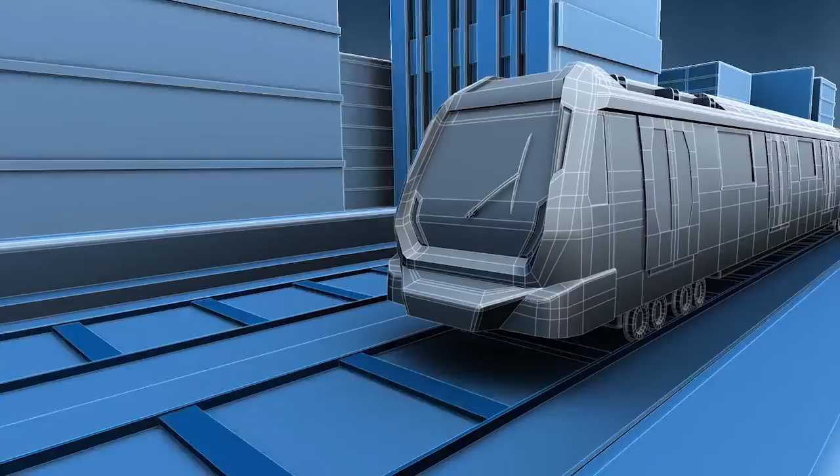A new transportation network is under construction in Kuala Lumpur. It is the KVMRT, the Klang Valley Mass Rapid Transit. The KVMRT's first alignment, the Sungai Buloh Kajang line, stretches a distance of 51 kilometers with 31 stations. A major section of the line is constructed above ground, while 9.5 kilometers is built underground. The KVMRT is part of a new transportation model that will change the infrastructure landscape of the Klang Valley.

I wanted a game changer, and I realized that for any modern metropolis to be vibrant, to be competitive, to be on par with some of the leading cities in the world, you've got to have a modern public transport system. The alignment will traverse through some of the most congested areas in the Klang Valley, challenging Malaysian engineers to deliver one of the most advanced infrastructure projects of the country.

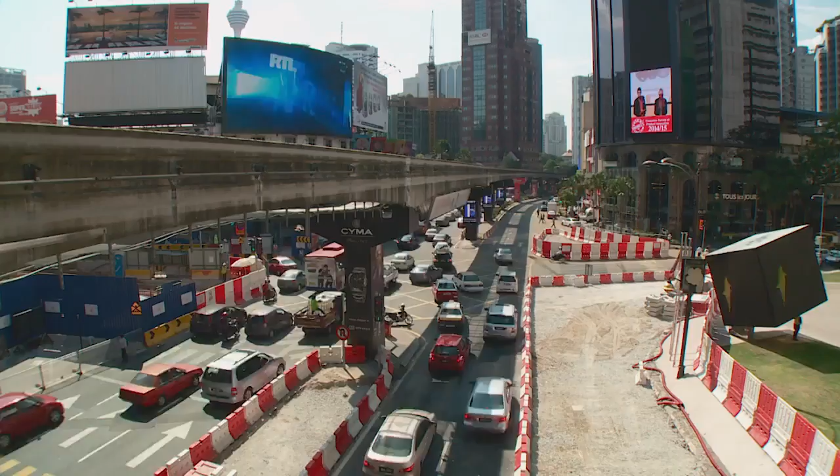Klang Valley or Greater Kuala Lumpur, a fast-growing metropolitan and home to 7 million people, with an expected increase to 10 million by 2020. This city is notorious for its traffic congestions. Every day, about 3 million cars enter the city centre.

We need a good public transport system for Kuala Lumpur and Klang Valley, because what we had was a public transport system which was not integrated.

In 2010, the Malaysian government initiated the Economic Transformation Program, ETP, to elevate Malaysia into a developed nation by year 2020. The objective of the program is really to transform the economy of Malaysia to become a high-income economy that is inclusive, at the same time sustainable.

We could not help but identify Greater Kuala Lumpur or Klang Valley as one of those national areas of focus. Part of the Economic Transformation Program, ETP, is to construct a mass rapid transit MRT system to create an integrated public transport network. We were quick to realize that it was just absolutely necessary for us to build a mass rapid transit in Klang Valley.

We didn't think there was any other option. We couldn't rely on other forms of transport such as buses and taxis to do it. We really have to move a lot of people within the city so that it becomes a lot more livable.

The MRT system for Greater Kuala Lumpur will first include 2 new MRT lines spanning 103 kilometers, serving a radius of 20 kilometers of the city centre. With the construction of these lines, people will be able to travel between populated residential districts, commercial centres and key employment areas within the Klang Valley.

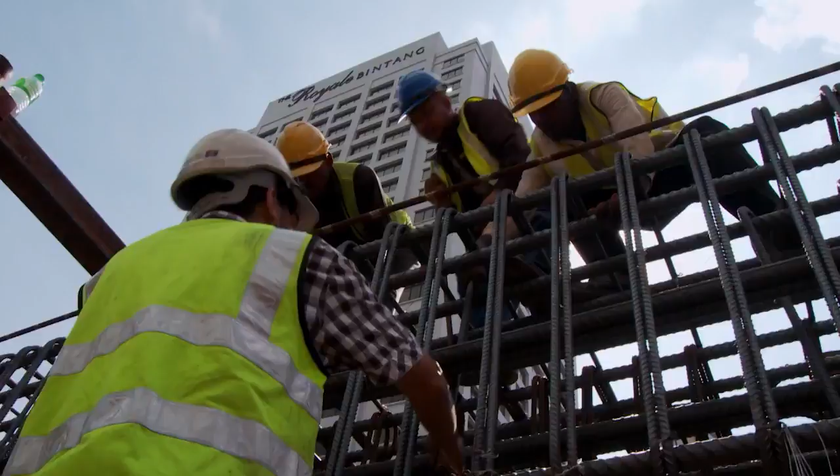In July 2011, the Prime Minister of Malaysia, Datuk Seri Najib Tun Razak, launched the biggest infrastructure project ever undertaken. It was his vision to improve the connectivity within the Klang Valley and radically enrich the lives of the people. The KVMRT's first alignment is the Sungai Buloh Kajang line.

It will stretch 51 kilometers with 31 new stations, serving a population of 1.2 million people. The majority of the line is constructed above ground, while 9.5 kilometers is built underground.

To execute the government's mandate to complete the KVMRT project, MRT Corporation was formed with Datuk Seri Shahril Mokhtar, currently helming the position of the Chief Executive Officer.

Basically, MRT Corp is owned by Minister of Finance Incorporated. So our role is basically as an asset owner, as a project developer. And we are a so-called liaison entity between the project partner and also the government.

On 10th February 2012, MMC Gamuda was appointed as the Project Delivery Partner, or PDP, for the Sungai Buloh Kajang line. The PDP approach is the best approach, again, when it comes to building a major infrastructure project.

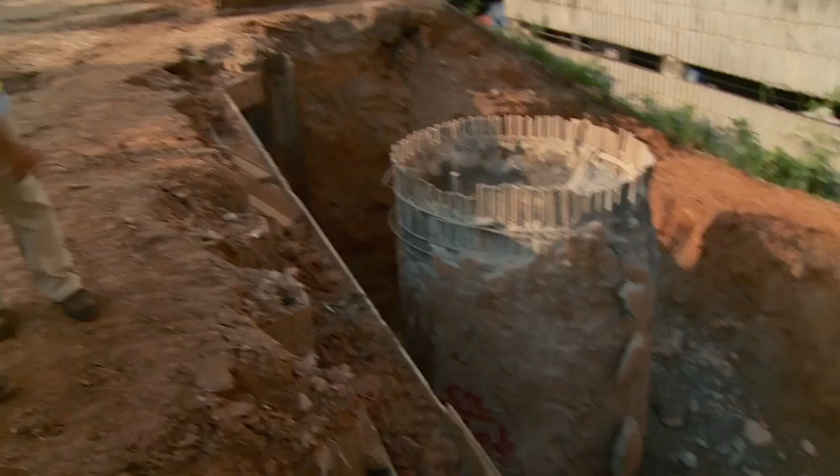The key element here is about risk. We basically transfer the risk to the project partner in order for them to deliver the job or the project within time, within budget, and they take up most of the risk.

A special MRT Exco committee was also set up to ensure that this project moves swiftly and smoothly. MRT Exco is very crucial in the whole spectrum of this project. The idea of having this MRT Exco is just to solve issues. It doesn't take long, maximum an hour, once a month. That is a very good platform in order to expedite the project.

But constructing a new transport system in the Klang Valley is not an easy task. Some parts of the KVMRT viaducts and stations weave through highly congested traffic areas.

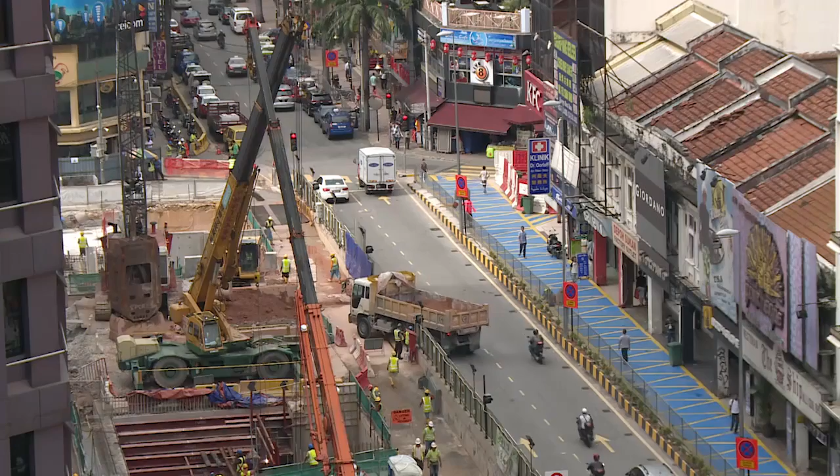To ensure that all parties, whether it is the community or businesses adjacent to the MRT alignment, are well informed of the construction activities, stakeholder engagements are carried out. Community engagement to me is a very important part of the whole construction process itself, because you can't build something through a community without engaging them. For Line 1, over 3,000 engagement sessions have been held with residents, resident associations, business people, traders and other groups.

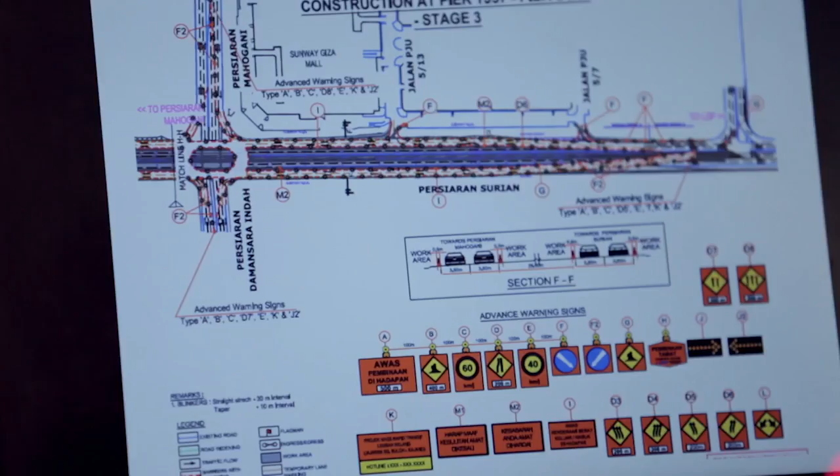To ensure that the construction of the KVMRT will create minimal disturbance, an extensive traffic management plan was put in place. Before we start any construction, we would have to plan the traffic management meticulously. What we do usually is we sit down in a room and do the desktop planning to tie in with the construction sequence. Then we do simulation.

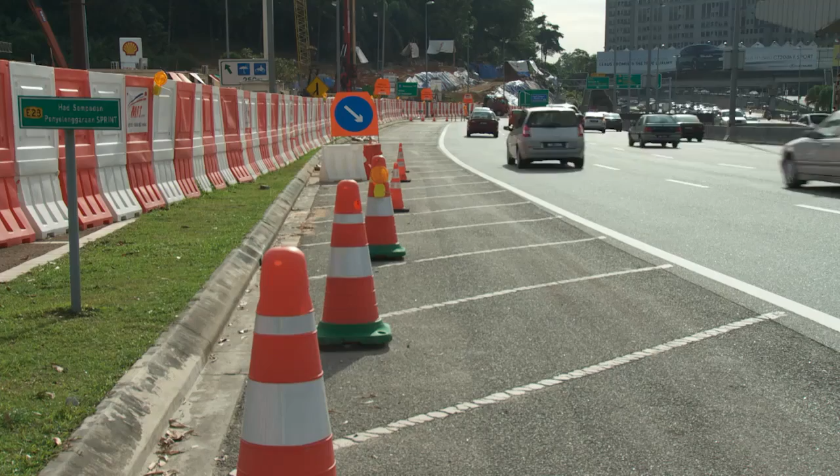This is then followed by a trial road closure. This trial closure is to see what is the impact when we actually do it. This is done to validate our study and our simulation. Once the trial is successful, then we go for full implementation.

One of the most challenging traffic diversions ever to be implemented is at the Persiaran Surian nearby Sunway Giza. This is due to simultaneous construction of an underpass. That particular area, we are building the station. We are also building an underpass for the local authority, which is part of the project. And we have had to do the traffic management in two major stages.

In all this, we have a traffic management team on standby 24 hours to make sure that nothing goes wrong. If there's anything that we did not plan earlier, then we can take care of that immediately. Road users' safety is always the number one priority. Our work should not put the public at risk, and therefore that's why we would close roads. We would hold up traffic. Yes, it's an inconvenience, but it's for the safety of the public.

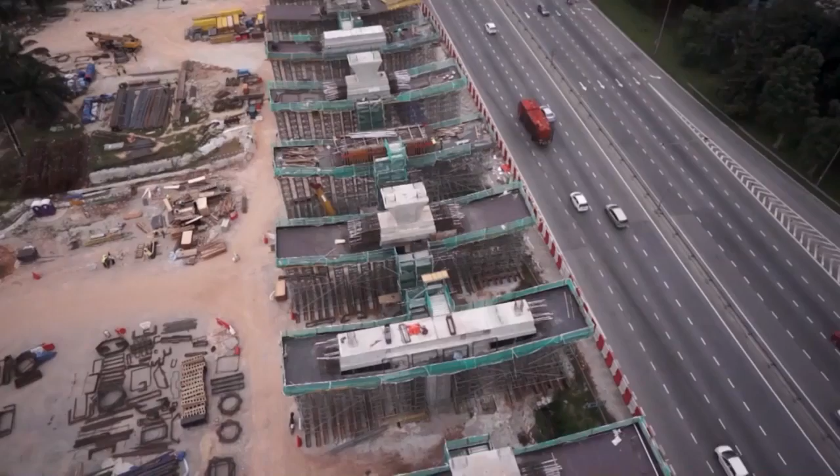The elevated section consists of 1,400 piers to support 17,000 segmental box girders that form the viaducts. There are 24 elevated stations and 2 depots, one at Sungai Buloh and another at Kajang.

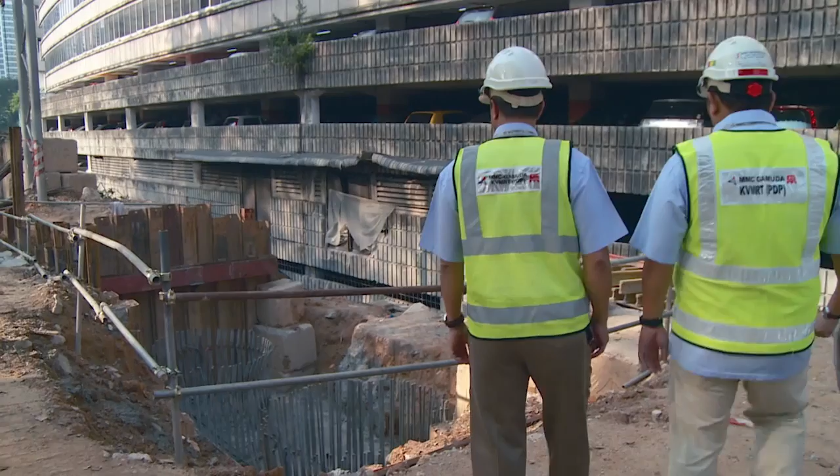To ensure the success of this project, a strict procurement process was implemented. Companies were subjected to stringent evaluations to ensure that only the best, most experienced and competitive contractors were selected. There are 8 different work packages in the elevated section, divided into the northern package, which runs from Sungai Buloh to Semantan, and the southern package, which runs from Cheras to Kajang.

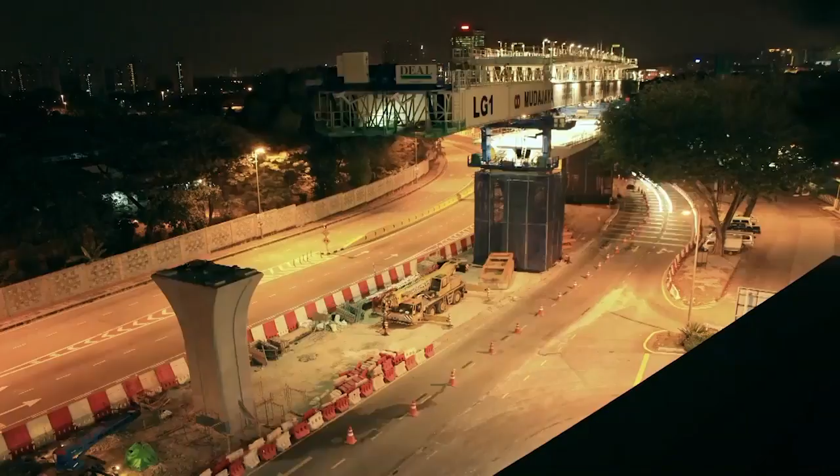400-ton launching gantries were used to build permanent viaduct guideways by erecting the segmental box girders, or SBGs. The gantry is basically a sort of a crane lifting mechanism. It lifts all the units together. It aligns them so they're all in a nice line. And at our peak, we had 21 gantries. That's a lot of gantries.

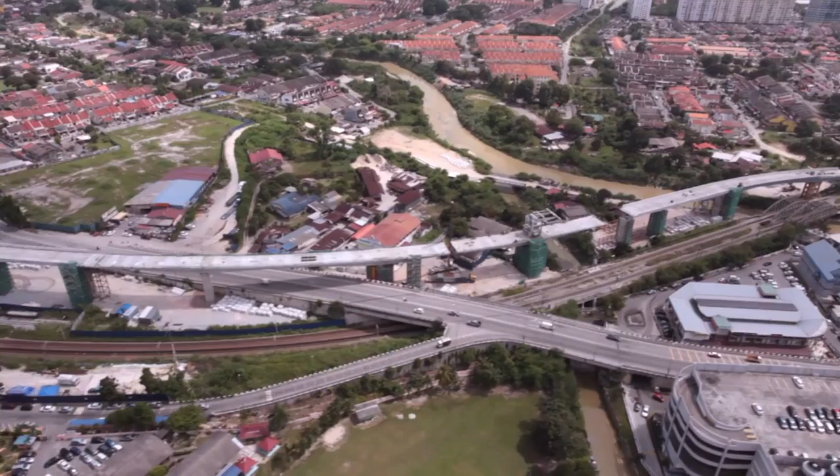The elevated guideways have to be built over existing roads and overpasses, making construction a challenge. The alignment itself must pass above the existing structure, name it a bridge or the highway. We have to pass above it.

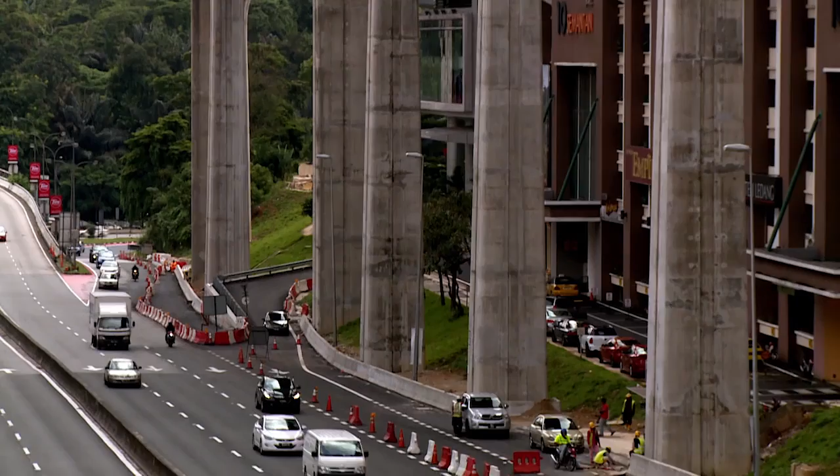At certain areas, the viaducts are built at extreme heights. When we talk about the gradient or the slope for a road, it can go up to 10%. But for train, it cannot go more than 3% because of the way the train operates. Otherwise, on rainy days, it will slip. That's why some areas you will see that the piers will be very, very high to make sure that the vertical alignment is maintained throughout the whole stretch.

While majority of the line is built above ground, one fifth of the Sungai Buloh Kajang line is constructed below ground. This is the biggest challenge faced by the construction team.

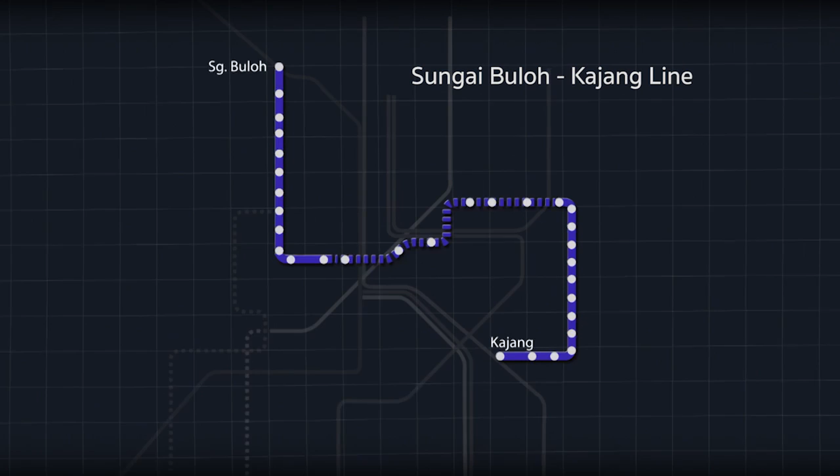The KVMRT's first alignment, the Sungai Buloh Kajang line, stretches a distance of 51 kilometers. To accommodate the construction within the city centre, 9.5 kilometers of the alignment is underground. For city centres, really the best thing is to put it underground. You don't have to demolish too many buildings. We're not looking to destroy areas, we're looking to enhance areas.

The design and construction of the underground works was awarded to MMC Gamuda KVMRT Tunnelling Sendirian Berhad for their extensive tunnelling experience and technological know-how. The underground section stretches from Semantan to Maluri while passing through 7 underground stations: Museum Negara, Pasar Seni, Merdeka, Bukit Bintang, Tun Razak Exchange, Cochrane and Maluri.

To build the tunnel, tunnel boring machines, or TBMs, were used to excavate rock and soil with special tools fixed on a rotating cutterhead.

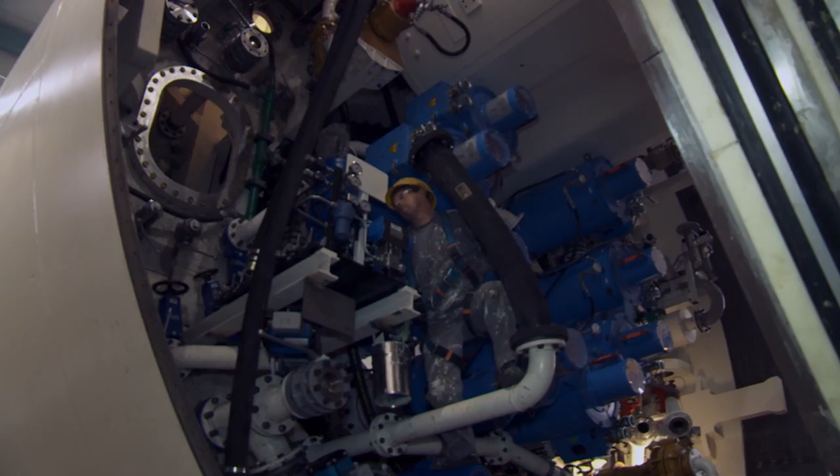MMC Gamuda KVMRT, working with German company Herrenknecht, came up with a revolutionary kind of machine, the variable density TBM, the first of its kind in the world. The first variable density TBM arrived in Malaysia in the beginning of 2013.

Transporting the TBMs to the sites through Kuala Lumpur was a challenge that needed detailed coordination. After 3 months of assembly, the first TBM was ready to begin mining. The launch of the first variable density TBM was officiated by the Prime Minister of Malaysia, Datuk Seri Najib Tun Razak, on 30th May 2013.

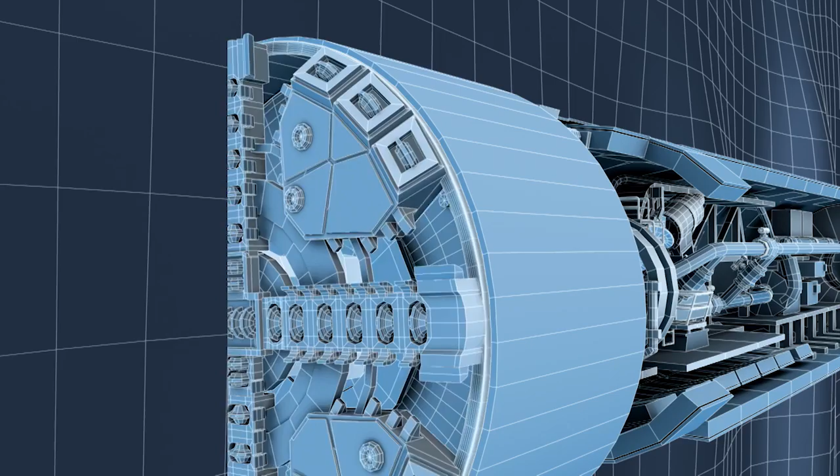The TBM is equipped to both excavate and build tunnel rings, which form the lining of the tunnel. Each ring consists of 7 segments and 1 keystone. A total of 11,500 segments were needed to line the dual 9.5-kilometer tunnels.

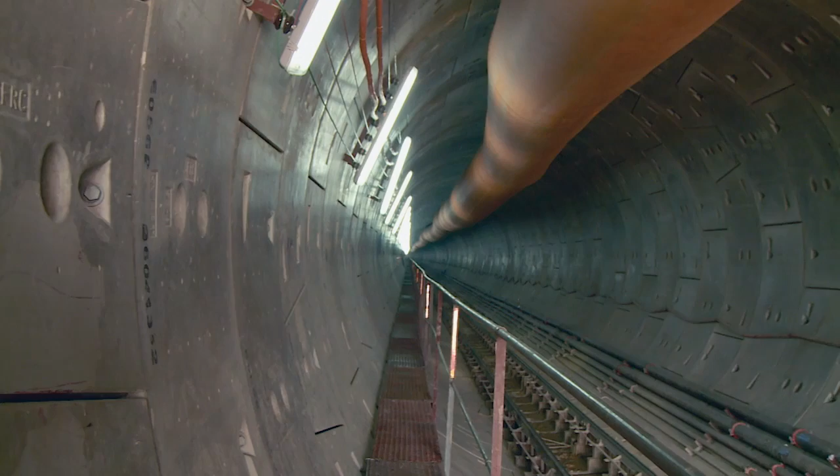Tunnel walls need to be strong enough to withstand extreme pressure and chemical attacks from the ground and water, and to also endure settlement caused by poor ground conditions. The tunnel segments were manufactured off-site at 3 different factories.

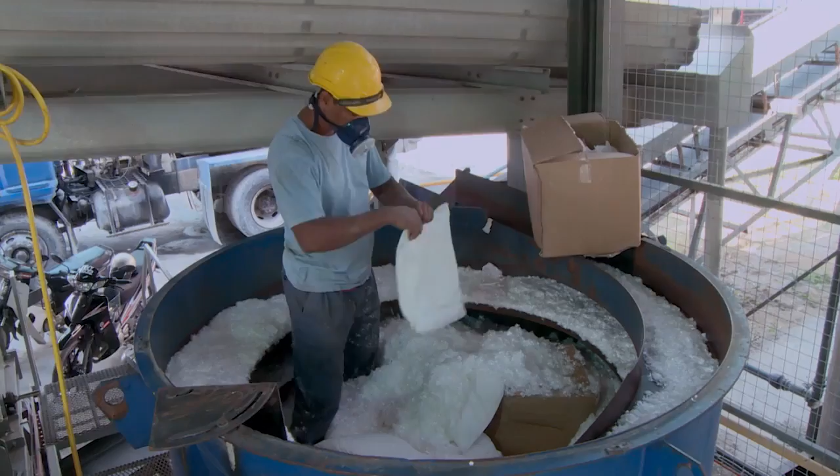We are adopting the technology we call steel fiber reinforced concrete, where we use a staple-like steel fiber to replace conventional thick and heavy rebar. On top of that, we are using another fiber called polypropylene fiber to improve the fire-resistant properties of our segments.

8 TBMs were used for this project. 4 TBMs were launched from Cochrane, 2 TBMs from Semantan North Portal, 1 TBM from Inai Shaft, and 1 from Pudu Shaft. The MRT tunneling project required thousands of workers over the 2-year period of construction, and MMC Gamuda set up an academy to train the hundreds of local workers needed for the underground construction works.

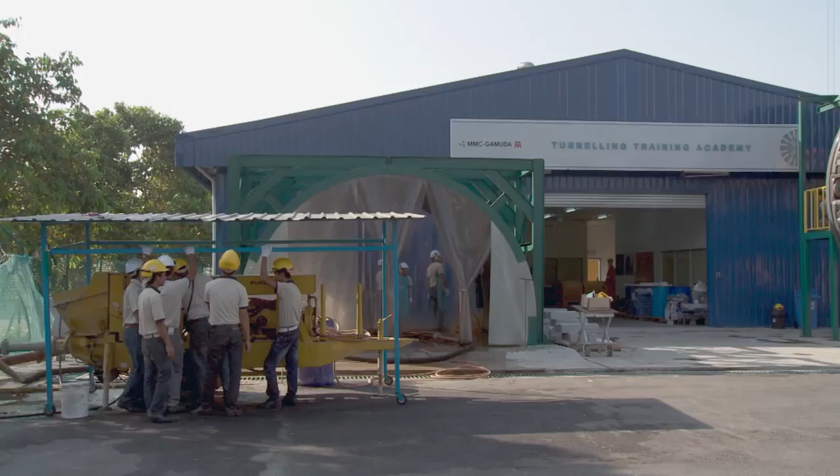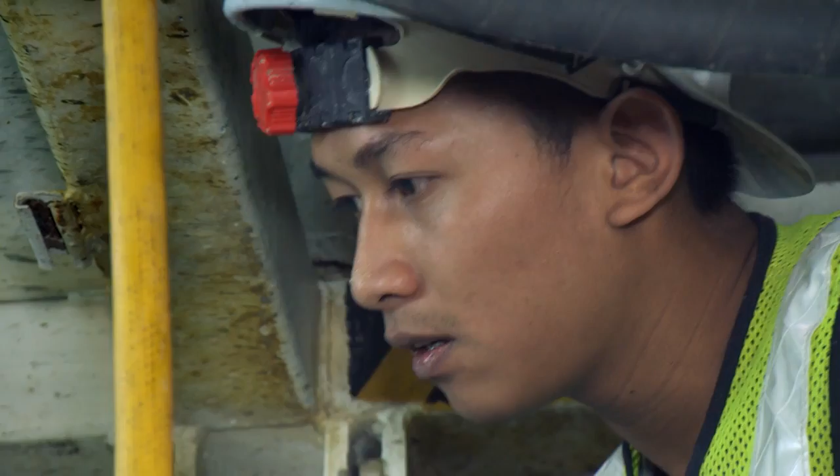The Tunnelling Training Academy, TTA, was the first of its kind in the world, with the aim to develop a workforce of highly skilled Malaysians who are proficient in the specialized field of tunnel construction. To date, over 16,000 professional and skilled workers have been trained at the TTA in various fields to support the tunnel and underground construction works, in particular for the KVMRT project.

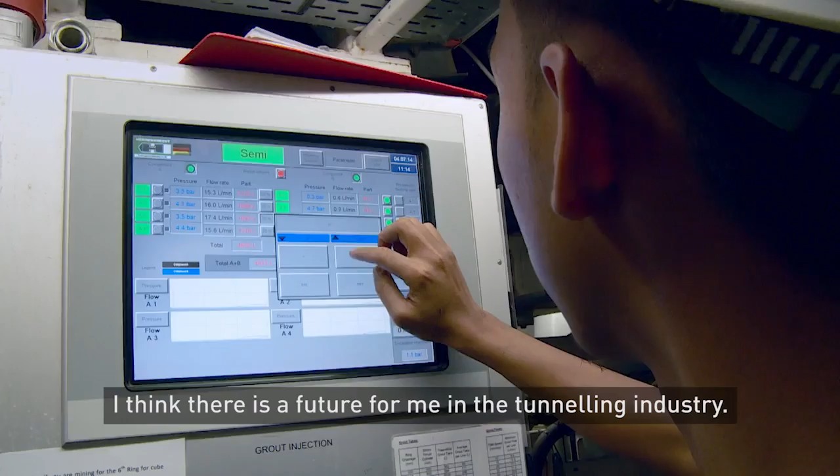I think the training of locals is very important. You need people to have the expertise. They've gone through the training school, they learn the basics, and then they've actually been put out on site and seen it in action, and that's enhancing their skills.

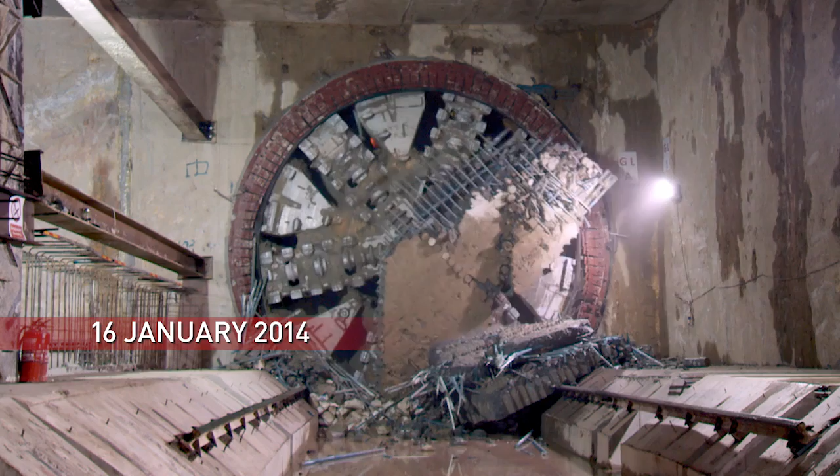The first 2 TBM breakthroughs were at the Muzium Negara station on 24th December 2013 and 16th January 2014. The machines were then pulled through and relaunched to continue tunneling towards the Pasar Seni station.

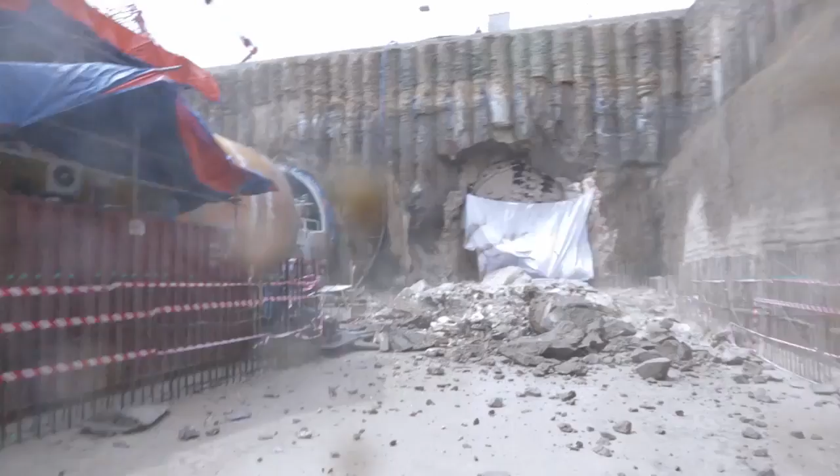On 24th April 2014, the fifth breakthrough occurred at Maluri South Portal with a big splash. This was the midpoint of the tunneling works.

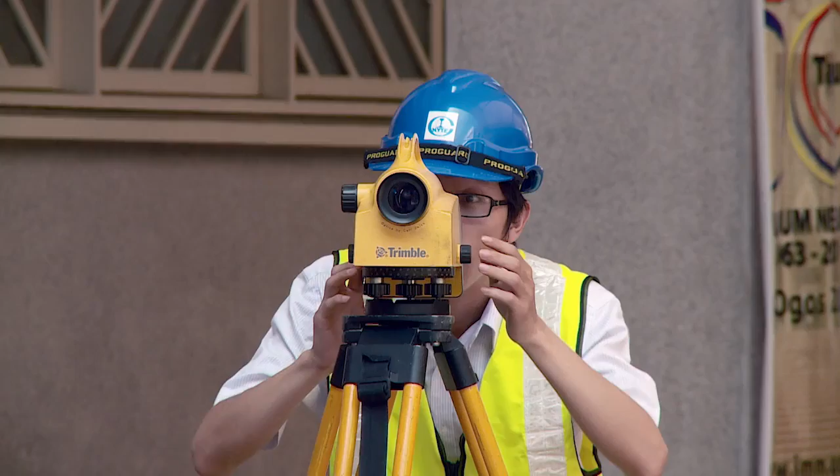Daily monitoring works are carried out on the structure and the picture murals. During the construction, we have allocated more than 200 instrumentation devices to monitor the Museum Negara building condition throughout all the days of our construction.

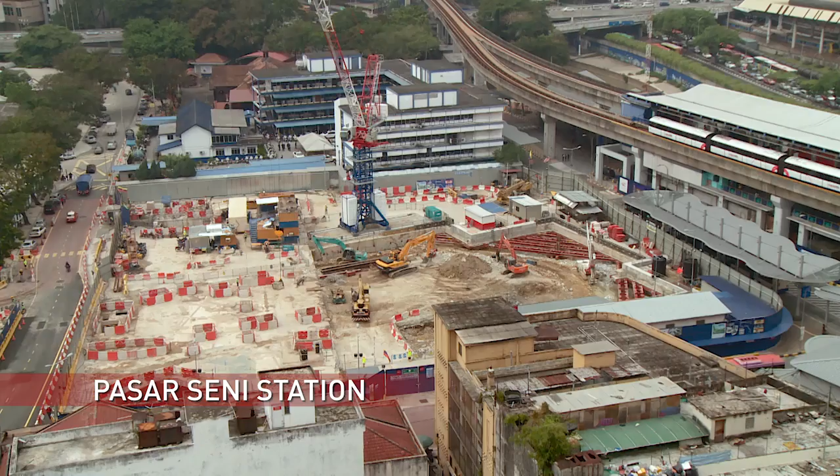The Pasar Seni station is located in Chinatown and connects to the existing Pasar Seni LRT station. Construction of this station required extensive protection of electrical cables that are part of the national grid.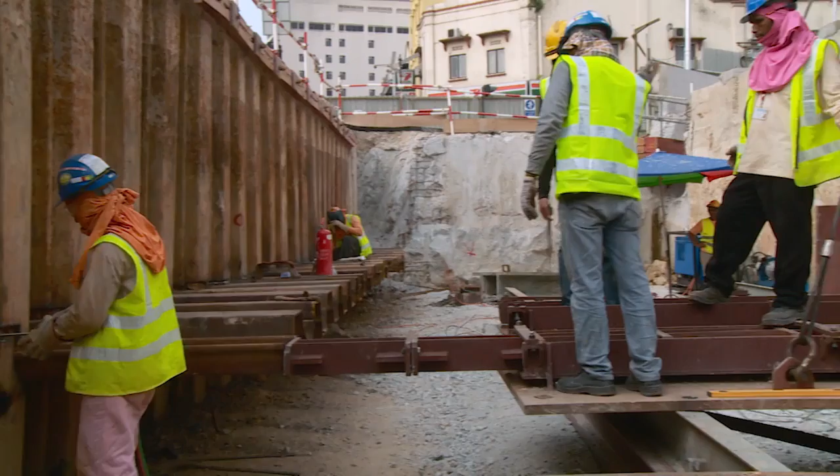While we were doing excavation, we got a big surprise. We found a 132 kV cable. This cable carries power for a third of Kuala Lumpur. A power cut here could cripple part of the city. We could not afford that to happen. A steel protection box had to be constructed to protect the 132 kilovolt cables located beneath the road.

The authorities insisted the cable stay in place. It cannot be moved at all. So the only option left for us was to build a steel box to support the cable so that we can work and excavate underneath.

All excavation works at the Pasar Seni station have been completed without any power disruption to the city.

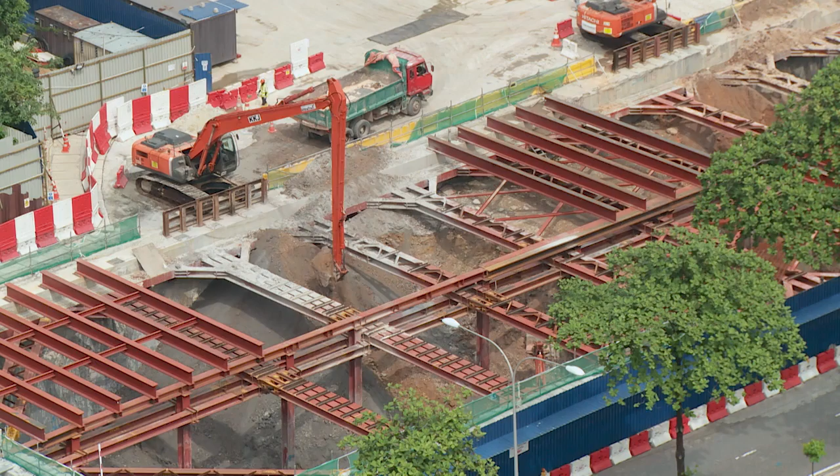The Merdeka station is located close to Stadium Merdeka and Stadium Negara. Over 30 meters deep, steel struts were required during the excavation works. The main challenge of this station is to construct 6 layers of strutting. We use up to 4,000 tons of steel to provide the earth retaining system strutting for our station.

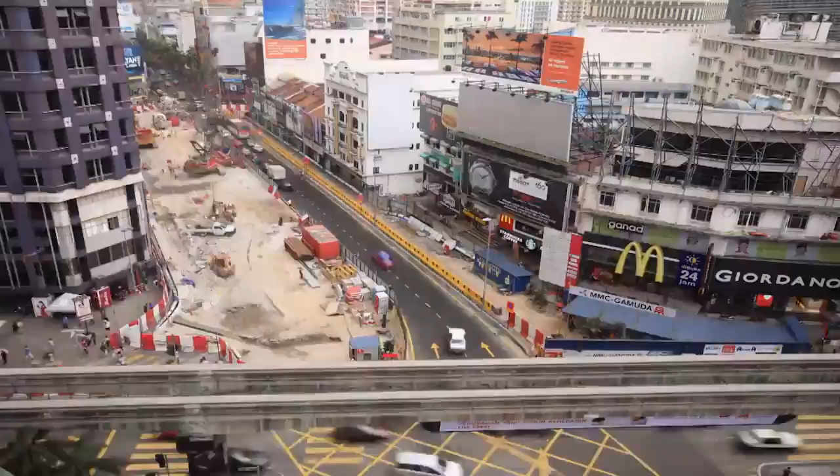Located in the heart of the Golden Triangle, the Bukit Bintang station is constructed in phases to ensure that traffic is not disrupted. The challenge for this area is traffic, definitely, because we have restricted hours. There are a lot of cars and a lot of public. Our challenge here is basically to maintain the environment with minimal disturbance.

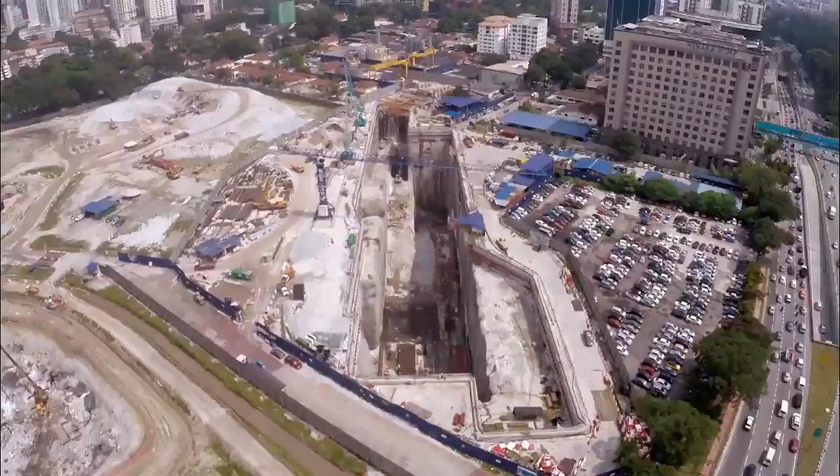The Tun Razak Exchange station is located nearby the future Tun Razak Exchange development. This is the deepest underground station, with a depth of 45 meters. It is built to connect with the future Line 2, the Sungai Buloh Serdang Putrajaya line.

The Cochrane station is within an area being transformed by large urban regeneration projects. Over 35 meters deep, the station works are moving forward quickly.

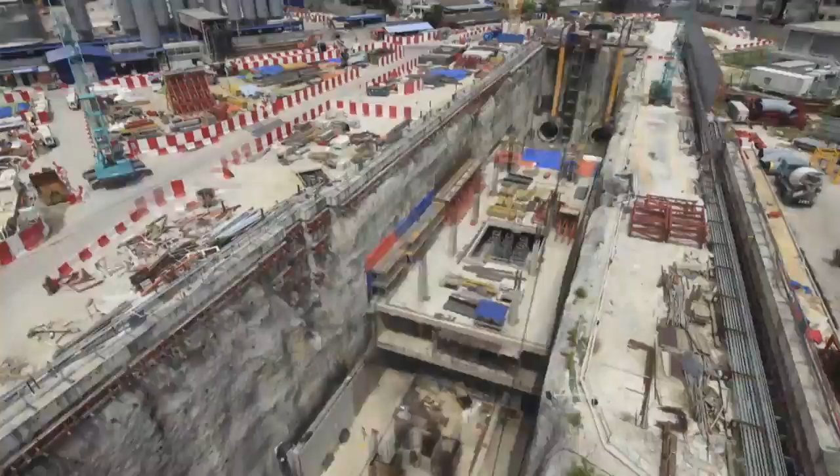Located beneath Jalan Cheras, the Maluri station was constructed in stages to ensure continuous traffic flow.

On 11th April 2015, the last TBM finally arrived and broke through at the Pasar Seni station. It is a thrilling moment for the engineers and tunnelling team.

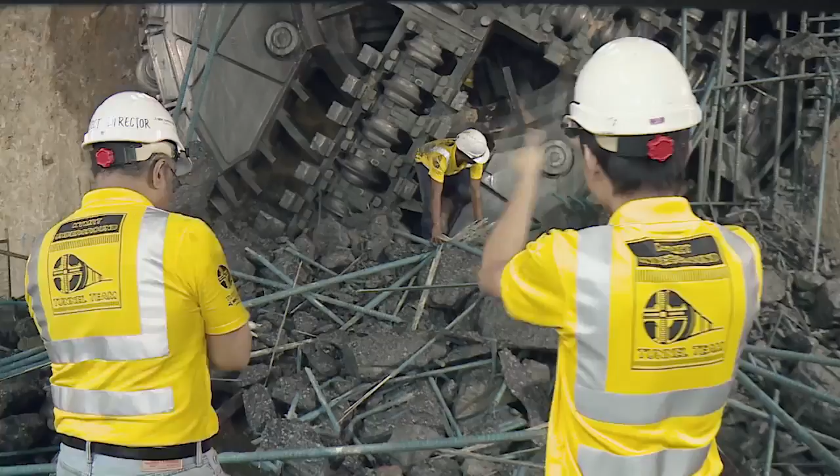The machine is the first TBM launched in the project from Cochrane, and it has mined the longest distance of 5 kilometers. I'm very happy. My team performed very well, and in fact we are a few percent ahead of schedule for tunneling, and it's all dedicated to this team of people who worked so hard.

This is the last breakthrough. I have attended a few breakthroughs. They're all done very well. It's very good, we are improving ourselves. You can see 10 TBMs already successfully implemented and completed without any problem to the surroundings. So you can see it's already proven. I think we are very happy now, and we are very confident that we can do more in the future.

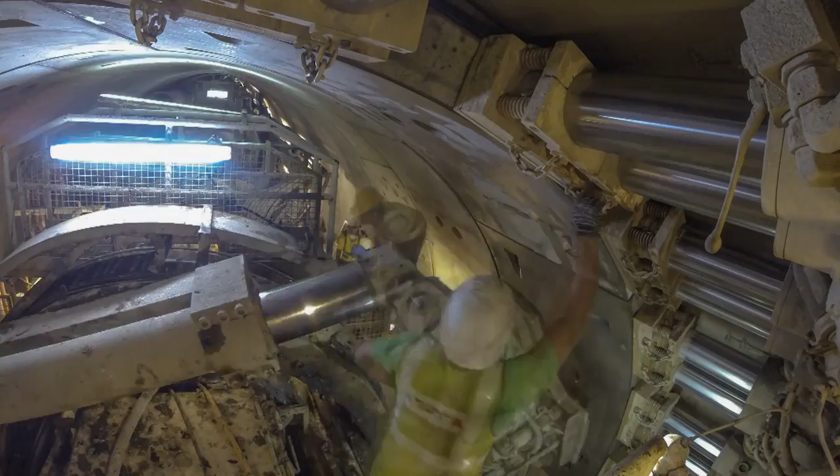The astounding innovation of the variable density TBM was internationally recognized and was awarded the International Tunneling and Underground Space Awards 2014 for the Technical Innovation of the Year category.

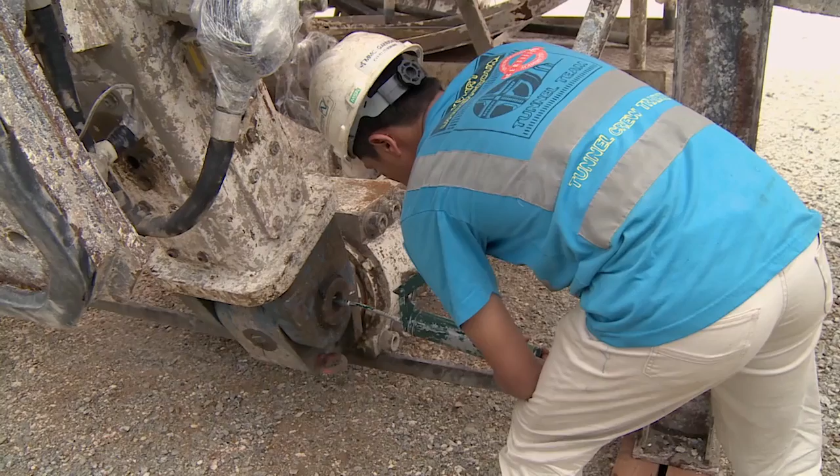As tunneling works have been completed, the TBMs were retrieved and sent to the TBM refurbishment plant located in Pusing, Perak. Here, the TBMs are cleaned and their sensitive electrical components disassembled for storage in preparation for future projects. The facility, the first in Malaysia, will enable the transfer of TBM refurbishment technology to Malaysians.

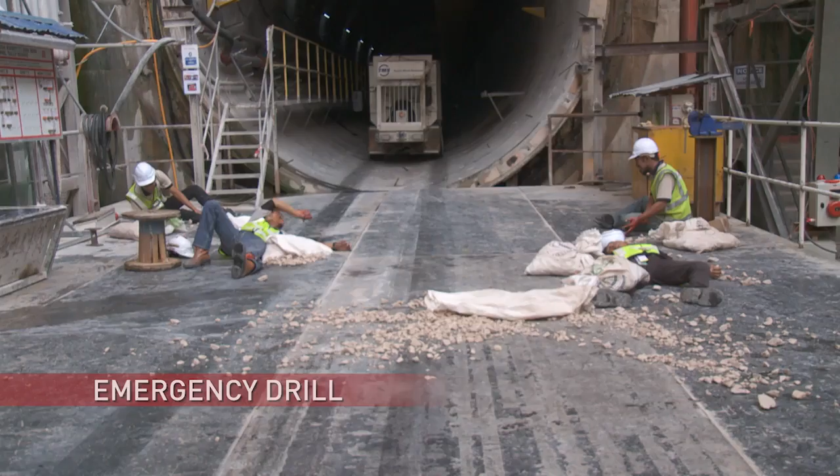As work progresses at the underground work sites, accidents are the biggest worry for the construction team. To ensure that the teams are prepared, drills are carried out regularly. Accidents at underground sites can be catastrophic to the construction progress, so emergency and rescue drills are conducted frequently.

Every 6 months, we have to carry out the emergency drill to give exercise to all of our workers. If an actual incident happens, we are prepared for it. The teams are tested on how well they can respond to an emergency, evaluating their actions and response time. We want to ensure the emergency response team is always prepared and ready in the event that a real emergency happens.

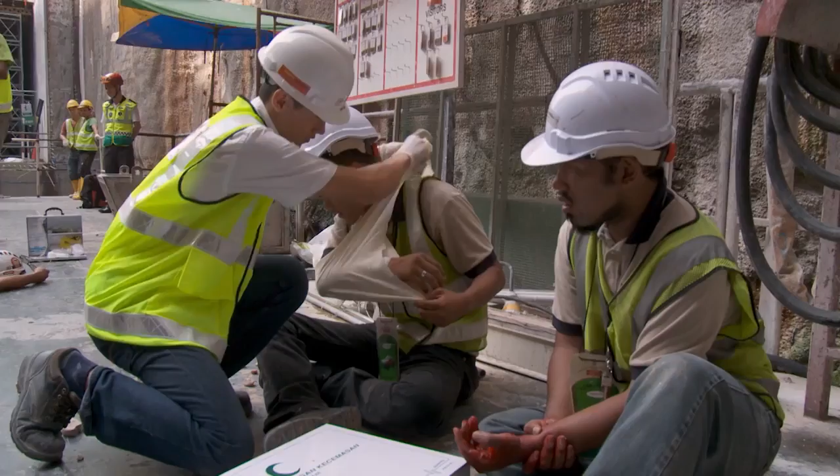At all the underground sites, engineers and workers are trained on safety awareness. MMC Gamuda KVMRT Tunneling Sendirian Berhad has raised the delivery and safety benchmark for the local construction industry to be on par with international standards.

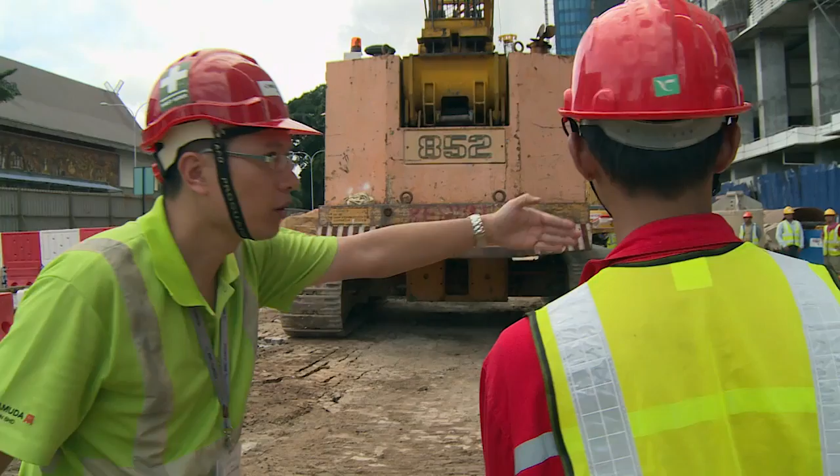Monthly audits are done by safety officers at each site to ensure they adhere to all safety requirements. This is our company policy to ensure that workers are safe to work here. So we are doing a routine monthly audit to ensure those safety rules and regulations are complied with, to ensure the site is safe to work. Of course, the workers are our valued asset, so we make sure those working here are safe.

In April 2015, MMC Gamuda KVMRT was announced a winner of the International Safety Award with distinction from the British Safety Council, in recognition of its commitment to health and safety management.

Once tunneling had been completed, concreting of the tunnel base was carried out. Laying of the tracks for the underground section and the elevated sections were done concurrently. On the main line end to end, we use the slab track.

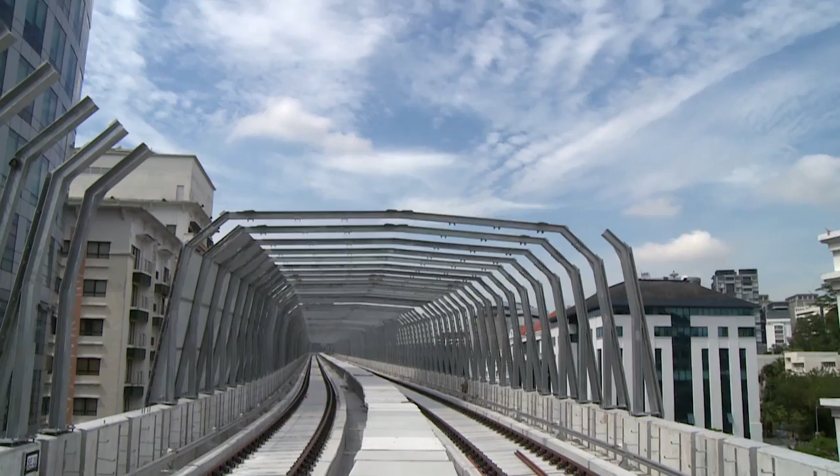Using resilient base plate to accommodate and mount the rail so as to minimize any noise and vibration of the track. To reduce noise pollution along the alignment, noise barriers are also installed.

When we were doing the design, there were certain areas that were very close to residential areas. And what we did was we engaged noise consultants to do simulations to see what the noise level would be when the trains start operation.

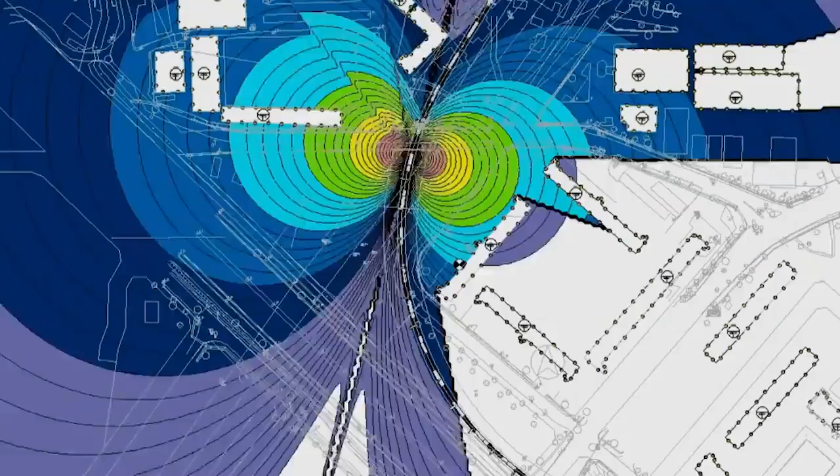The Institute of Noise and Vibration, University Technology Malaysia, is a national center of excellence in noise and vibration. We undertook detailed analysis to determine locations that may be affected by noise and vibration along the entire alignment. We were then involved in the detailed design of noise and vibration mitigation measures along the alignment.

As advised by the consultants, three types of noise barriers were installed to control the noise propagated by the train operation. The first type is a short vertical kind of barrier. The second is a bit higher; it has a small canopy towards the inside that mitigates the noise further. And the third category is a full enclosure to maximize the suppression of the noise generated.

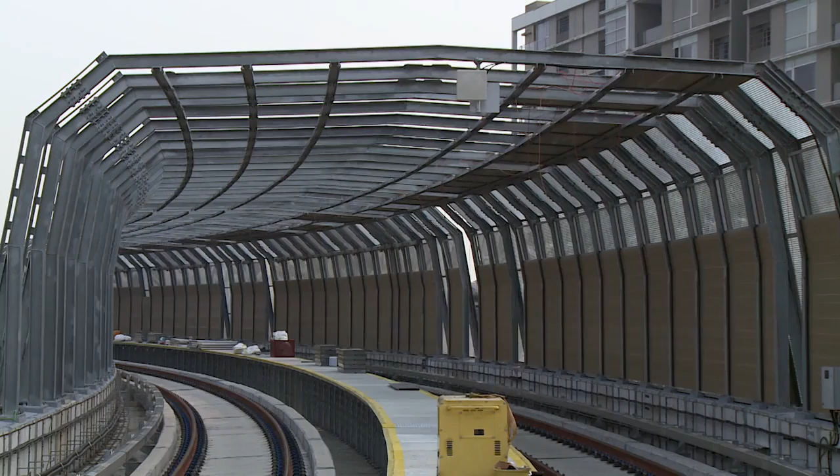Along the Sungai Buloh Kajang alignment, there are 24 elevated stations that all have a unifying design and look. They wanted an identity to the station, and they wanted a master identity to the line. So the way he always looks at design is that we look at the essence and we look for something that's going to express something Malaysian about the station.

The design and concept of the elevated stations are inspired from the Malay Wakaf, a traditional shelter for travellers. The idea of the station was, we call it Wakaf, being a sort of pavilion structure that you find usually in the landscape, synonymous with paddy fields and things like this. But the idea of Wakaf is also that the transportation is a sort of a gift to the people. It's something for the people.

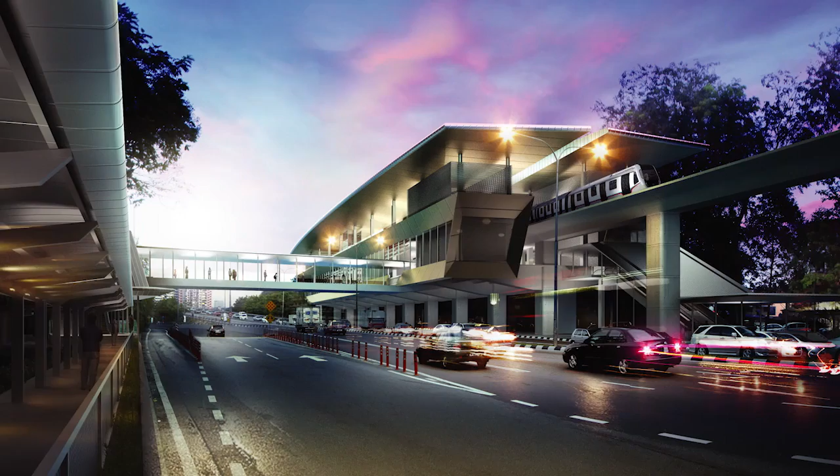In keeping with the Malaysian identity, the station design is in tune with the country's environment. It should become a tropical station. You know it's a tropical station. So what's the first thing? It's big overhang roofs, natural daylight, naturally ventilated, some sense of greenery, public plaza attached to that. So these were all a series of ideas under the umbrella of the concept of a wakaf.

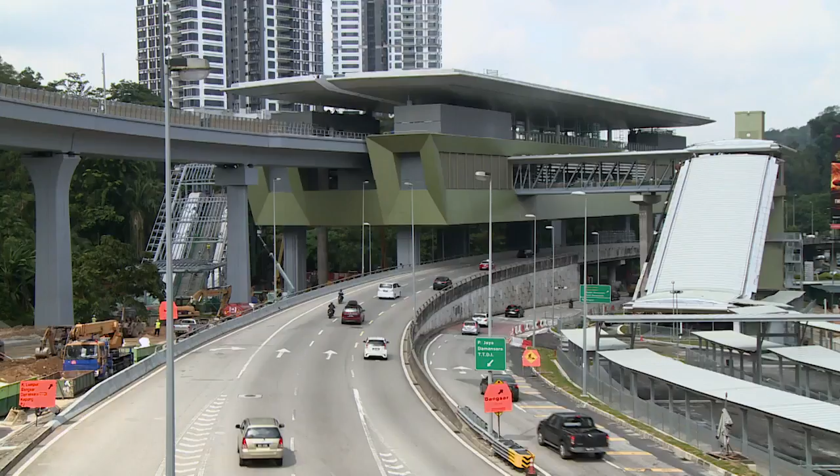Sustainability was also a main consideration. A repetitive design, obviously, there is some efficiency to doing that kind of design. In terms of construction, you can do all the prefabrication of all of this off-site. So there is a sustainable component to making all of them consistently in one kind of design.

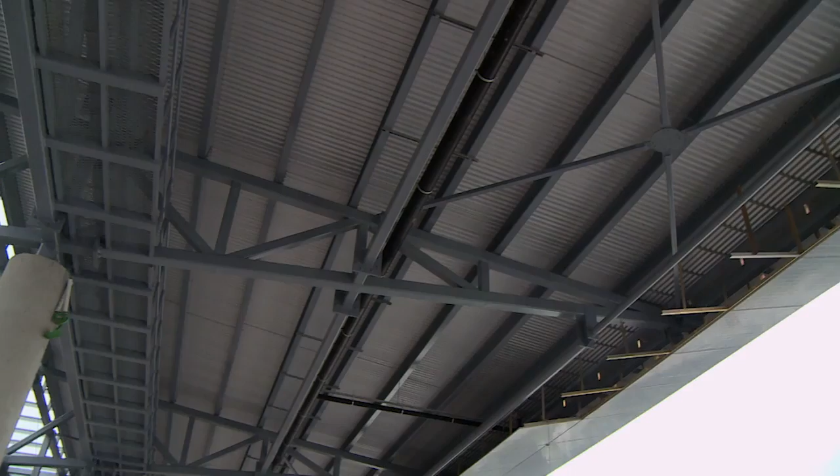The extended overhangs of the station's roof will help reduce direct sunlight and incoming rain. These structures have huge roofs. They are collecting rainwater for basically all the toilet facilities and water use within the building, and later to harvest solar with PV cells on top of it. So all of that they already actually integrated into the design.

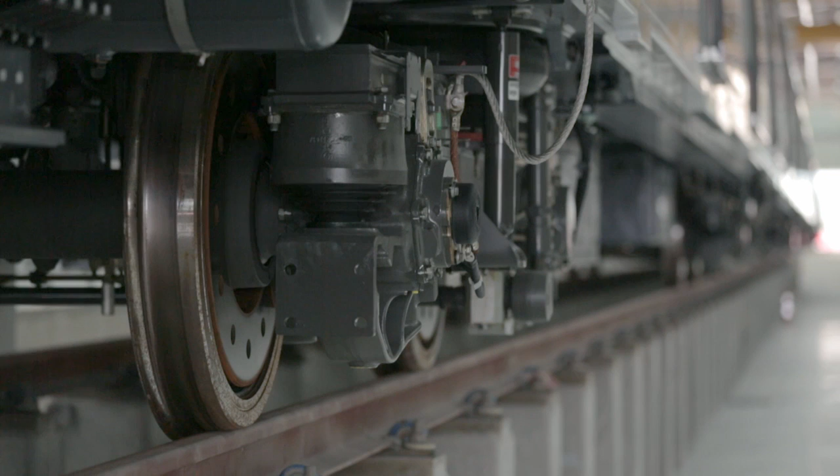To minimize power consumption, the train traction power system has also been designed to accept regenerated electricity as the trains decelerate. They're actually implementing brake pad energy, energy from brake pads from the trains itself onto the energy collection for the buildings. So they're adopting a few of these elements of sustainability within the building.

For the underground stations, the architectural design concept for the ground-level entrance structures are inspired by the multifaceted quartz formation of Kuala Lumpur's Klang Gate's quartz ridge. The 16-kilometer long ridge is the longest of its kind in the world. We took inspiration from it, and the shape, the multifaceted shape of the quartz crystal and its multi-coloured reflections sort of resonate with the multiracial spirit and the cultural richness of Malaysia.

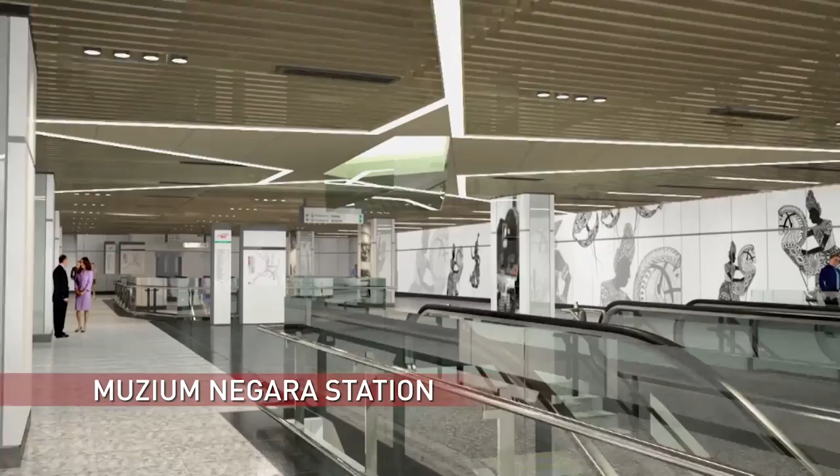Each underground station has individual design themes that reflect each station's unique site and historical context. Muzium Negara Station is located next to the National Museum. The theme, Transition, is based on the museum as a treasure trove of all things old in contrast to its neighbouring new development. At its concourse level, columns with glass cladding depicting modes of public transport from yesteryears provide a sense of nostalgia in an otherwise sleek and contemporary station interior.

Pasar Seni Station is located near the meeting point between Sungai Klang and Sungai Gombak, thus the theme Confluence. Being the birthplace of Kuala Lumpur, the concept of the interior design is a tribute to this confluence by stylizing its Y shape into a contemporary design motif.

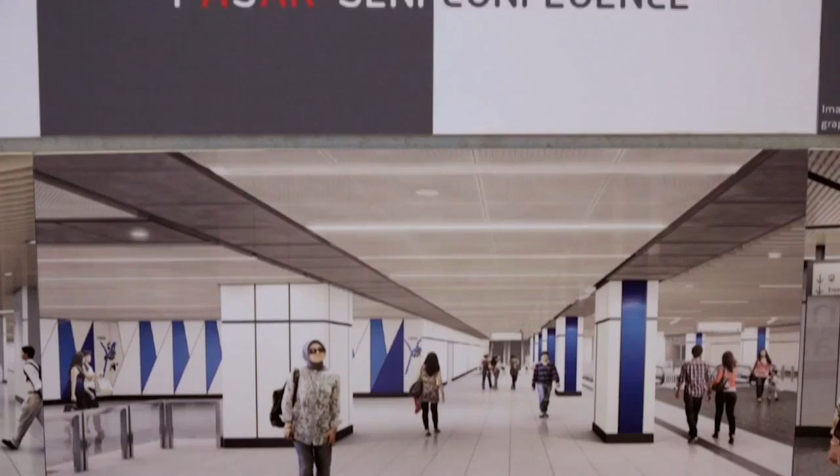Merdeka Station is located near Stadium Merdeka, where independence was proclaimed in 1957. The theme for the station is Independence. Here, patriotic images will be featured, including the proclamation of Merdeka by the late Tunku, as well as text of the Rukun Negara. This station will be integrated with the future KL118 development, which will be the tallest building in Malaysia. The Bukit Bintang Station is located at the Golden Triangle of Kuala Lumpur, a place that never sleeps.

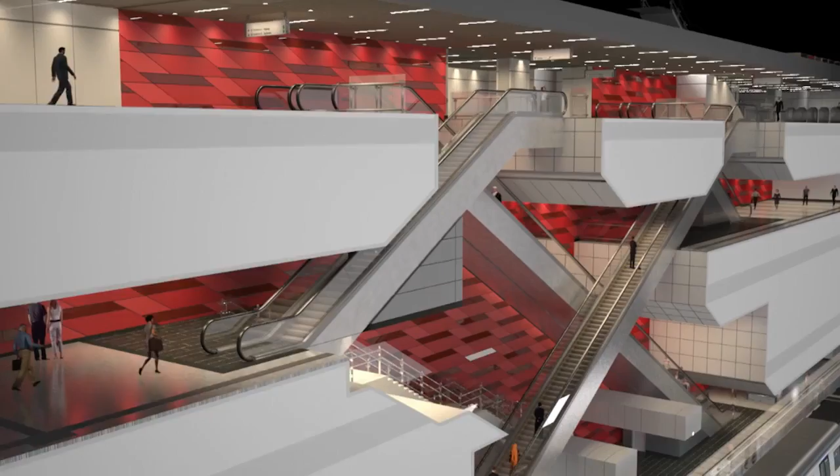The theme of the station is dynamic. The ever-present dynamism and vibrancy of this area is expressed in a bold, 4-storey high feature wall composed of a dynamic trapezoidal geometry in different tones of red that suggest movement.

The Tun Razak Exchange Station is located at Kuala Lumpur's future financial district. As Malaysia is at the forefront of Islamic finance, the theme of this station is Islamic Corporate. The station design will project an Islamic identity with contemporary, formal and corporate ambience. Islamic motifs will be expressed in the columns, walls and ceiling.

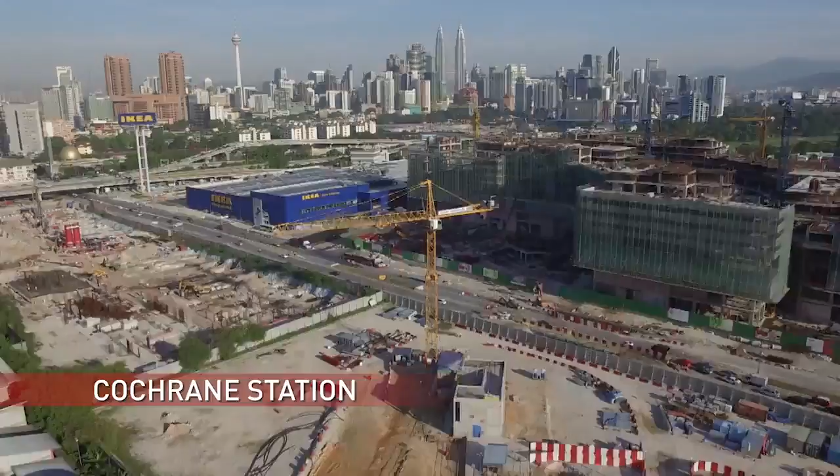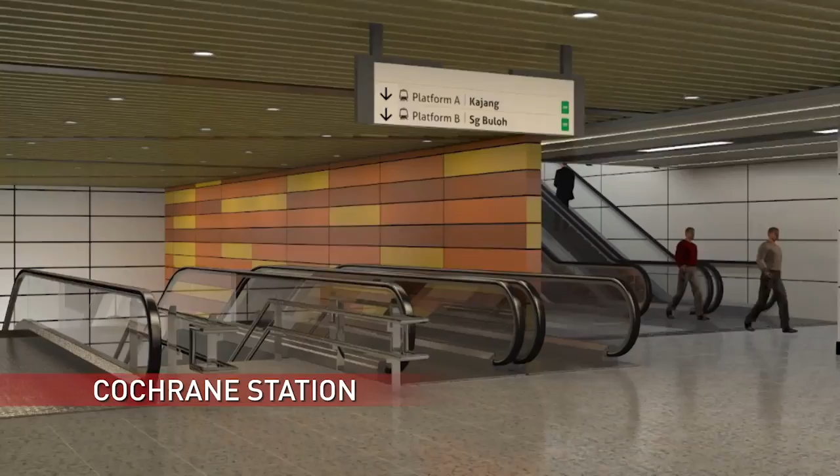Both Cochrane and Maluri stations are located in parts of Kuala Lumpur which are currently being transformed by two large urban regeneration projects. It is envisaged that both stations will play a major role in injecting vibrancy into the site contexts. The theme for Cochrane Station is Urban Living, while for Maluri Station it is New Generation. In both stations, a combination of colours is used to bring a fresh, fun and cheerful ambiance.

Another unique feature of the underground stations is the concept of incorporating ideas from local young talents to design the bench for each of the stations. An Art Express initiative, a bench design competition, was introduced by MMC Gamuda KVMRT. We decided to invite younger talent, younger brains from colleges and universities to participate in a competition where they could come up with something.

After going through a judging process, the final 3 designs were displayed at NU Sentral. Here, the public were able to vote for their favorite bench design.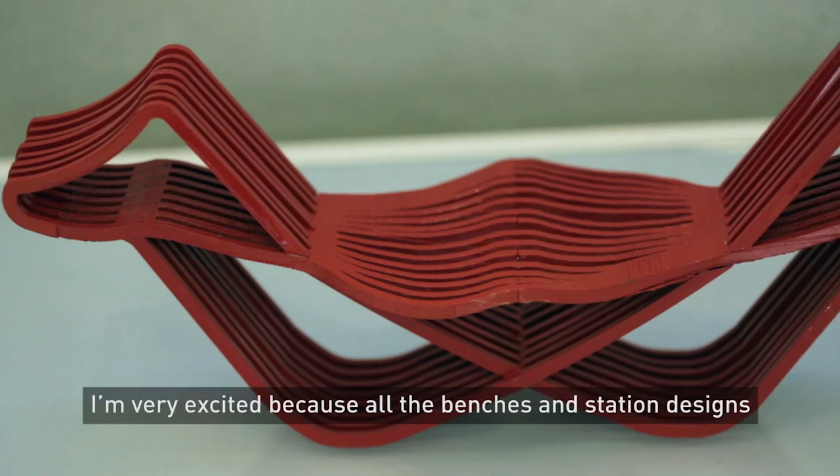We think with this approach we can involve the public, and since they use the stations more than anybody else, it's for their comfort and for their use.

We've had a very good response. I understand it's about 2,500 votes per day being cast, and we should have a fairly good response in terms of overall cross-section from the community.

MMC Gamuda KVMRT, together with MRT Corporation, finalized the winning designs on 26 February 2016. We've had 6 winners, and I think we've seen some great talent today, some great designers for the future.

I think everybody's very excited. They're very proud of what they've produced. I'm very happy because I think we've got some really nice designs that are going to go into our underground stations.

On 15th December 2015, emergency rescue responders from 8 fire stations were rushed to the Pusat Bandar Damansara MRT station. An emergency rescue scenario is underway. A fire has broken out at the station platform, and the driver of an approaching works train slams the brakes, causing 2 workers on board to fall and be trapped.

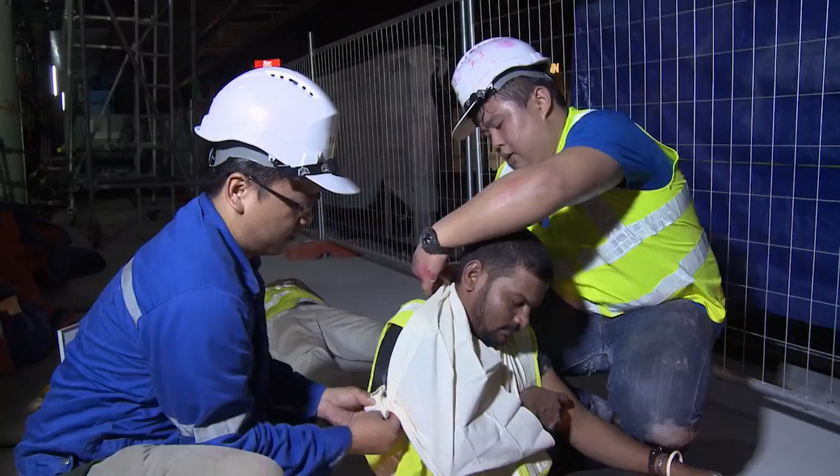MMC Gamuda KVMRT, together with MRT Corporation, has set certain emergency regulations at all work sites. When the incident happens, the first responder has to notify the control center at the Sungai Buloh depot, who will then activate the emergency services. We have a few procedures in place, and from what I've seen, they're actually quite good because they can apply the procedures.

These exercises are also critical for the emergency rescue services. We need to do this drill because we need to be familiarized, and also we need to help Bomba familiarize themselves on how to act in events of emergency, especially on the viaduct.

This is something quite new in Malaysia, to rescue people from the viaduct at an elevated platform. The emergency drill was a success.

This effort is part of the MRT Corporation and MMC Gamuda's initiative of introducing a zero-tolerance program. It's of utmost importance because when we talk about safety, we're talking about people's lives. Anything could happen because these boys on the ground work 24/7. We can't avoid incidences, yeah?

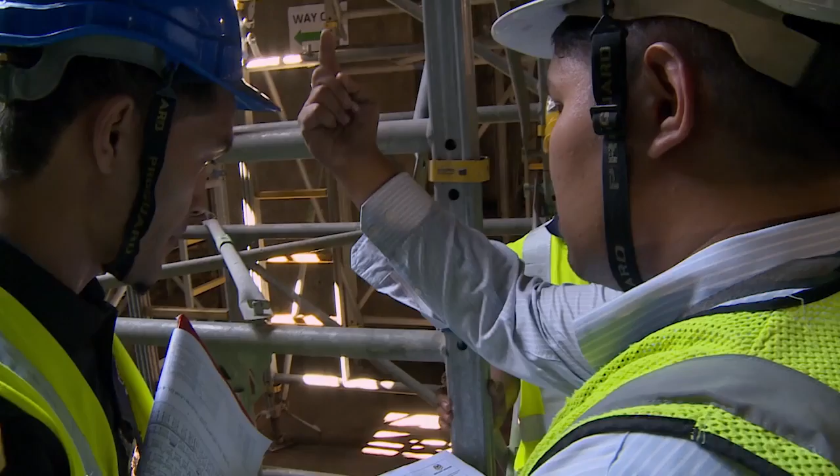But we must be able to find a way to mitigate the risk of having incidences. With this program, tighter supervision, streamlined checks and approval procedures are done to ensure worksite efficiency and that safety compliances are met. Apart from the team that the contractors have on the ground looking after the safety of everybody involved in the project, we are going to put in additional personnel to make sure that they focus on certain very, very high-risk areas and high-risk activities.

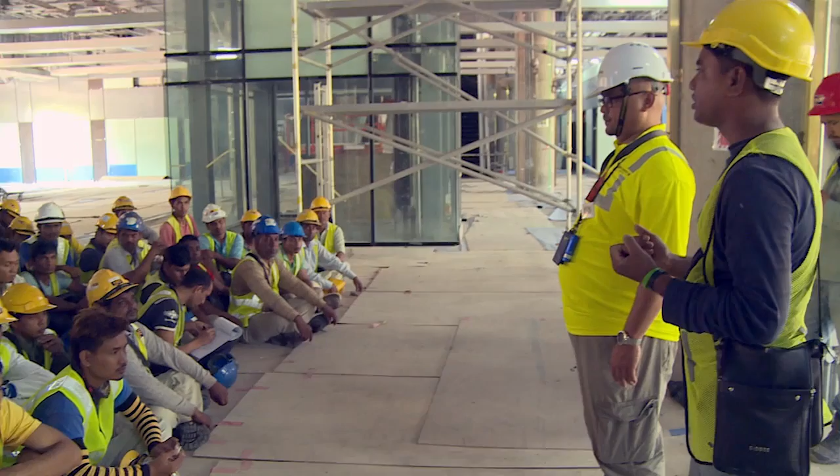The Zero Tolerance Program allows safety superintendents to halt works immediately if construction does not comply with the method statement and safety measures. Toolbox talks are also carried out on a daily basis at the beginning of every work shift.

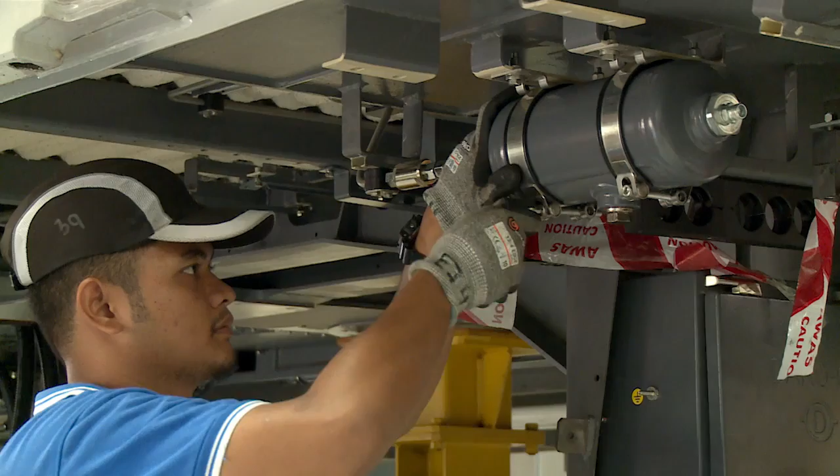For this KVMRT project, the trains are designed by BMW Group Design Works USA and engineered by Siemens AG. The theme, Guiding Light, was chosen for the external design of the train, representing a strong and solid character as well as modernity and timelessness.

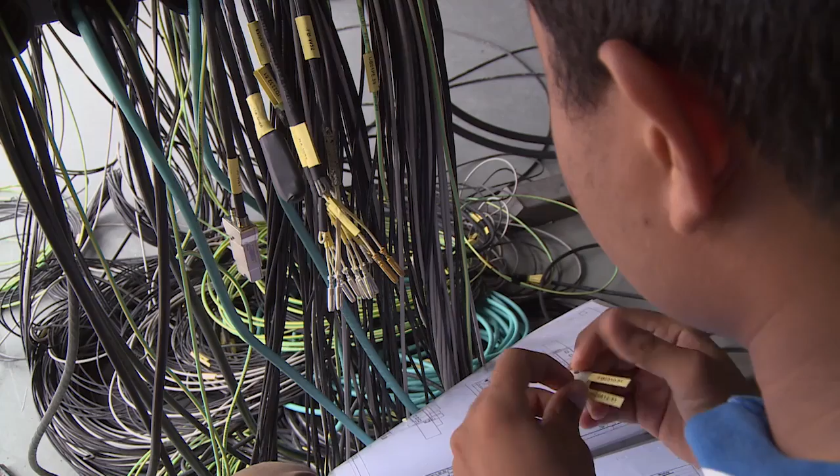The interior of the train is designed to not only be aesthetically pleasing, but to offer a high standard of comfort for passengers. Components of the train come from all around the world. The mechanical and electrical components come from several countries in Europe, while the train's car body comes from China. The parts are shipped and assembled together at Malaysia's very first train assembly plant, located at Rasa, Hulu Selangor.

For a full set of production in Rasa, it takes around 45 days for a train set. This is the first full-fledged assembly plant in Malaysia. Every single thing, the interiors, the exteriors, every single component here is fitted in Malaysia.

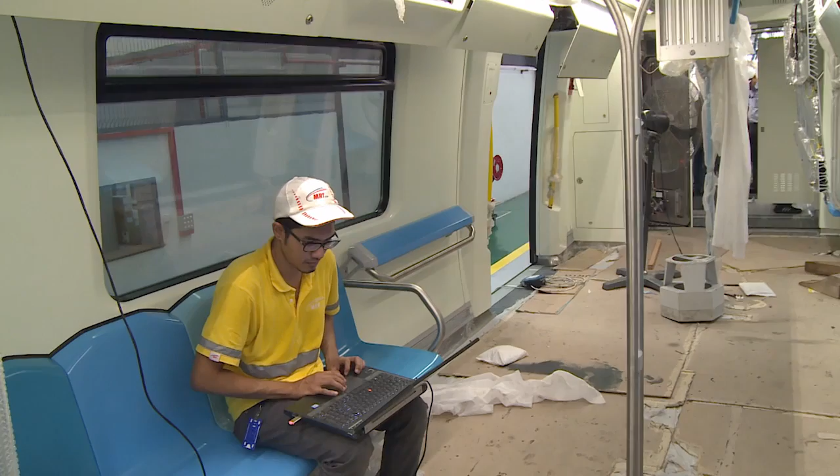After all the components are installed, the trains go through a series of tests to ensure that everything is in place and installed precisely. We have tens of thousands of wires to be tested, so we have this computerized wiring testing machine that can test the functionality, installation and continuity of all those wires automatically.

The trains are also put through a water test. We carry out the so-called water test to make sure that when the trains are put into service later, they will not leak under the heavy rain of Malaysia.

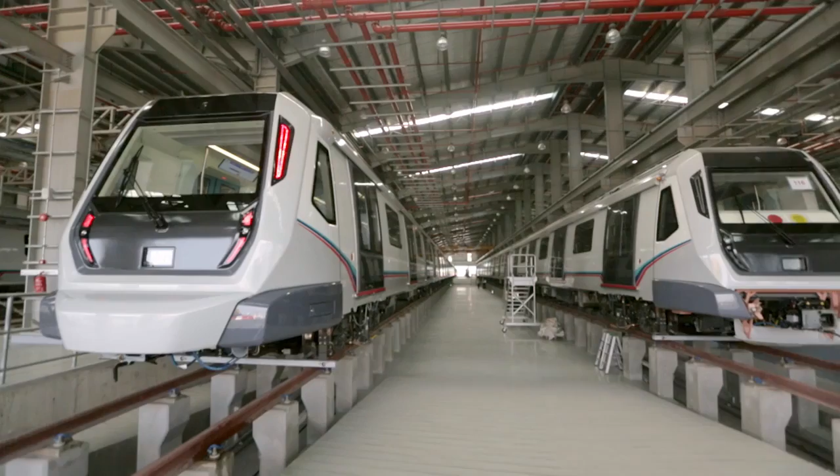After all tests are carried out, the completed train sets are transported to the Sungai Buloh depot. With a size of 162 acres, it is the biggest train depot in Southeast Asia.

This depot can house 60 trains for Line 1, and we can also accommodate more than 40 trains for Line 2. So it is a huge depot, and it has all the equipment that can support the overhaul and heavy maintenance in addition to the light maintenance of the trains for Line 1 and Line 2.

At the Sungai Buloh depot, trains are programmed to commence testing daily according to the actual schedule of the trains. After a whole day of dynamic testing along the 1-kilometer testing track, the trains then return to their designated parking space at the train stabling yard.

To further test the system that is in place, the trains are taken to the main line to be tested on the tracks.

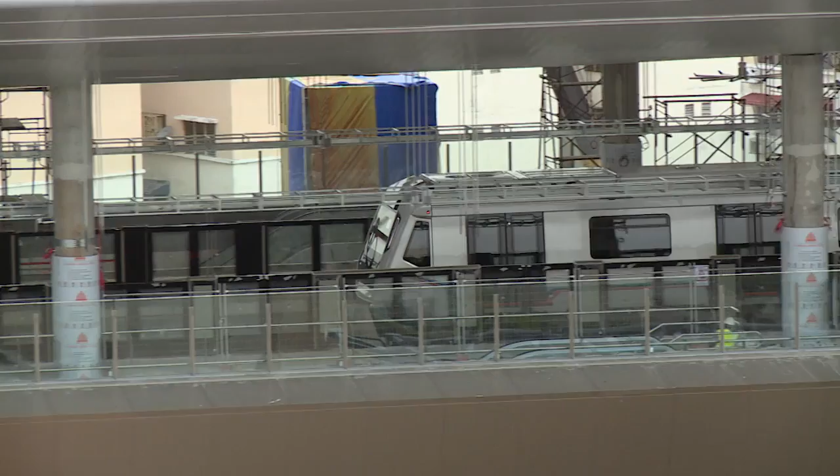We've now put a train actually on the viaduct to do some tests, and the public will actually see that, starting very slowly, building up, but eventually will be running quite reasonably fast over a section to demonstrate that the train can meet its speed. So this is another good achievement.

The trains are of the latest technology. Its state-of-the-art integrated train automation system will ensure reliable and highly efficient operation. One feature of our MRT system here is that we use a driverless system, so all the trains can be operated automatically by themselves. It's one of the longest fully automatic MRT systems in the world.

Each train is made up of 4 cars with a width of 3.1 meters. They are able to accommodate up to 1,200 passengers per ride. We can run 33 trains per hour, so in each direction during the peak hour, we can carry 40,000 passengers per hour. So you can imagine from both directions, we can actually carry 80,000 passengers into the city center, and we are taking away tens of thousands of cars from the city center, which is a tremendous saving to the environment.

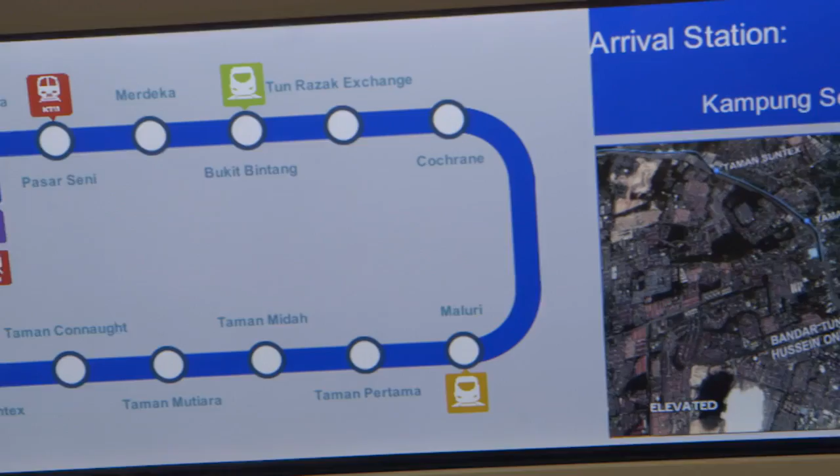Dynamic maps displayed all over the train give real-time information for the passengers. You can see the stations, the next station, and also other video that can introduce what is around the area, and which side of the door will open. So it's very informative, configurable, and very user-friendly. Unlike the old days, you only have dots to show where it is.

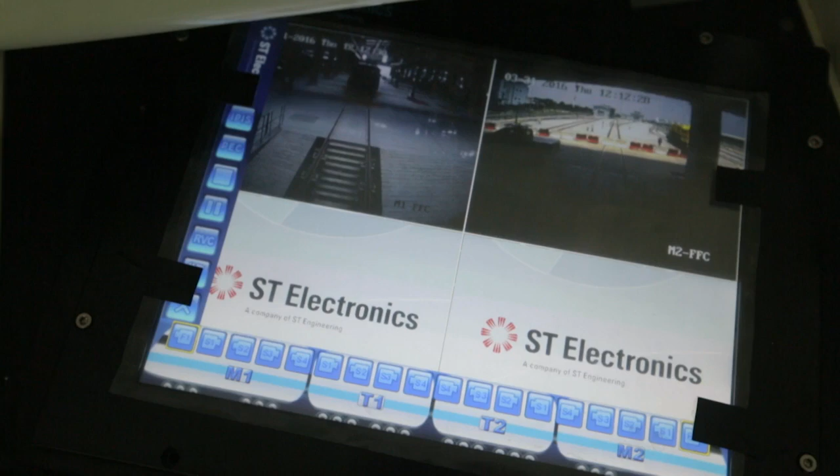The trains are also equipped with enhanced safety features, with surveillance cameras installed on the outside and inside of the train. We have 42 cameras per train, so we make sure that the passengers on board are safe, and they will feel the security of it and feel comfortable traveling on the train.

In the event of an emergency, passengers are able to communicate with the control center via the built-in emergency intercom with an integrated camera. When a passenger pushes the button, the OCC operator will automatically see his face and see what is going wrong. So you can see that this is a very advanced feature—the latest application of this kind of technology.

With enhanced safety and security in place, the KVMRT trains also meet international standards for fire protection. The train is also designed to be environmentally friendly. It is built with sustainable materials and has high recyclability at the end of the train's service life. It also employs highly efficient air conditioning, lighting, and braking systems that reduce energy consumption.

As of June 2016, 37 trains have already been delivered and are currently stationed inside the train depot.

On 11th November 2015, the Prime Minister of Malaysia, Datuk Seri Najib Tun Razak, visited the Sungai Buloh depot.

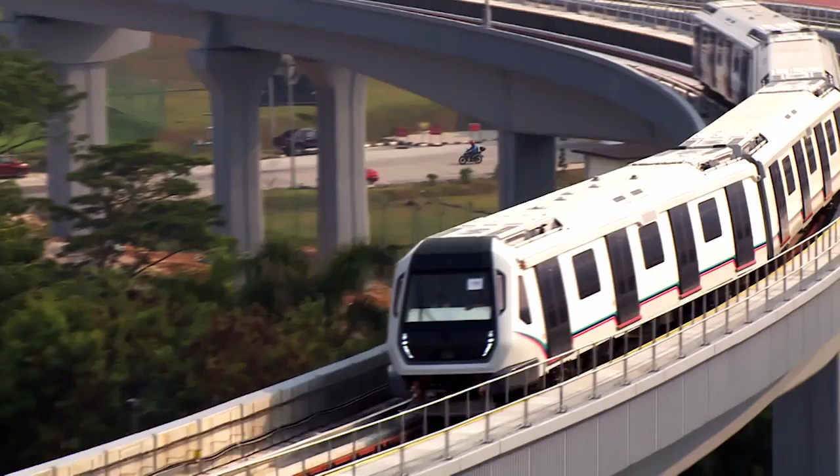Definitely, I'm excited to use the MRT system for a simple reason: I don't have to spend about close to 4 hours a day on the road unproductively. I'm pretty excited about the upcoming MRT, so I hope everyone can leverage it and hopefully improve the way we move around.